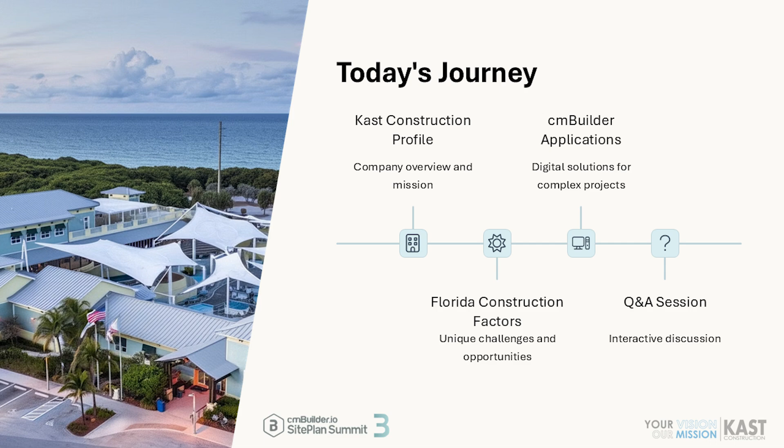If any of these facts are incorrect, you can blame the internet, because I'm not from Florida, but I can attest to a lot of it. I definitely want to show you basically how all the factors that we have down in Florida, from the coastline to the atmosphere to all the weather, all the challenges that we have - basically how we use cmBuilder to address that. And then we'll save a little bit of time for some Q&A.

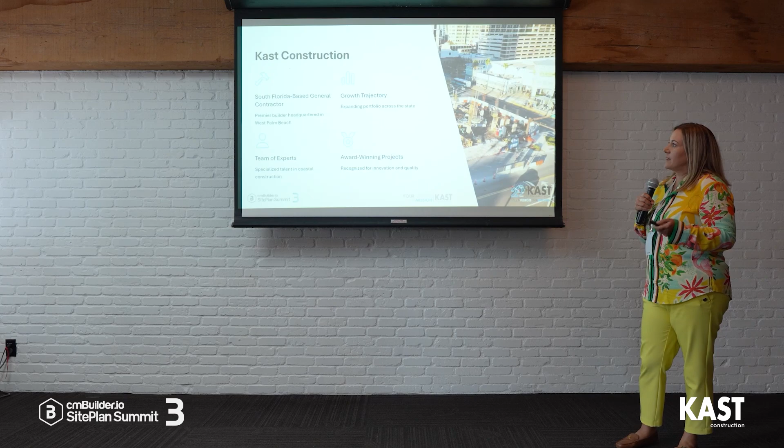All right, so KAST Construction - I mentioned they're South Florida based. We've got a few offices, but basically we've only been around 20 years. So someone mentioned 100-year companies - we're not even close. We're a pretty young company.

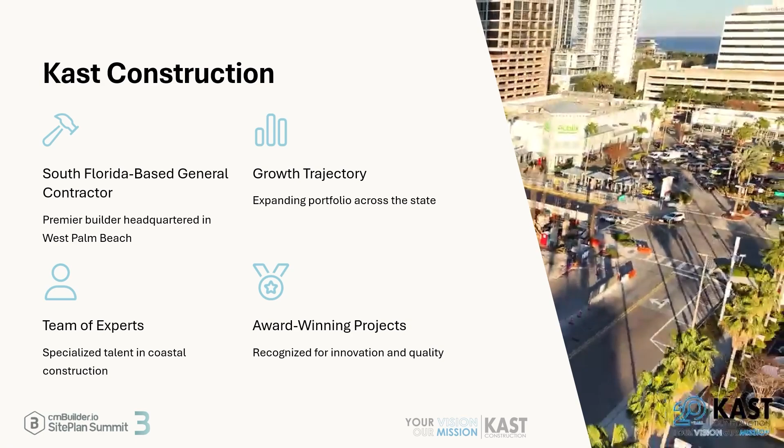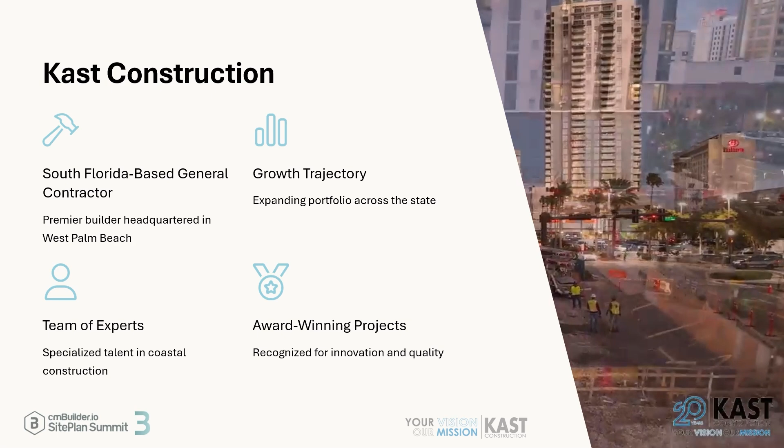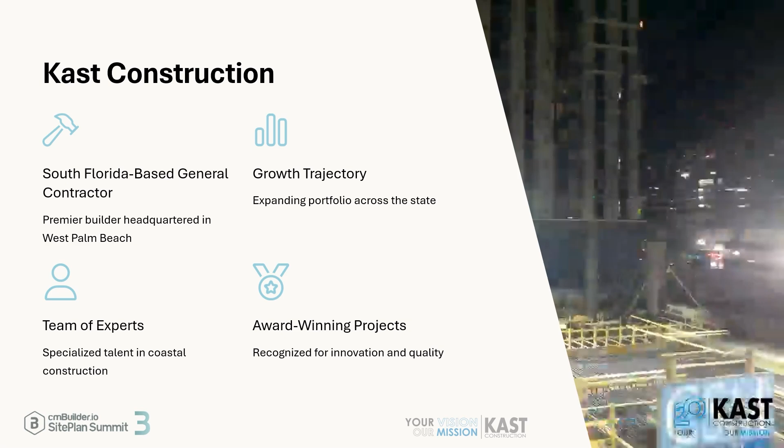Basically, the person who started KAST Construction was a builder of single-family homes. They decided, hey, we basically want to start our own general contracting company, and we want to start building high rises. And so that's how KAST was started.

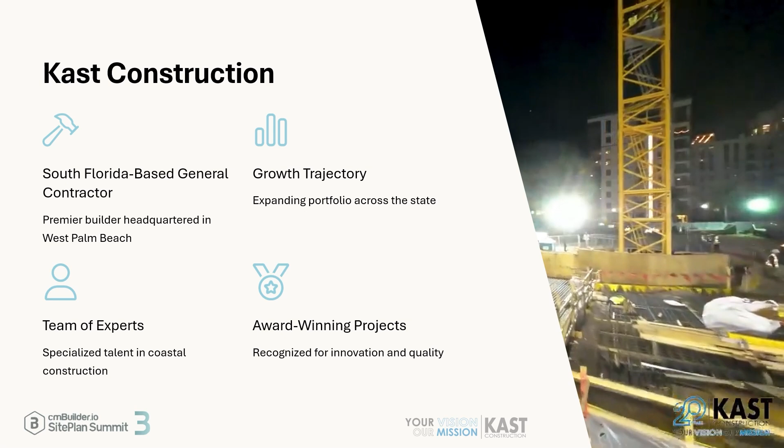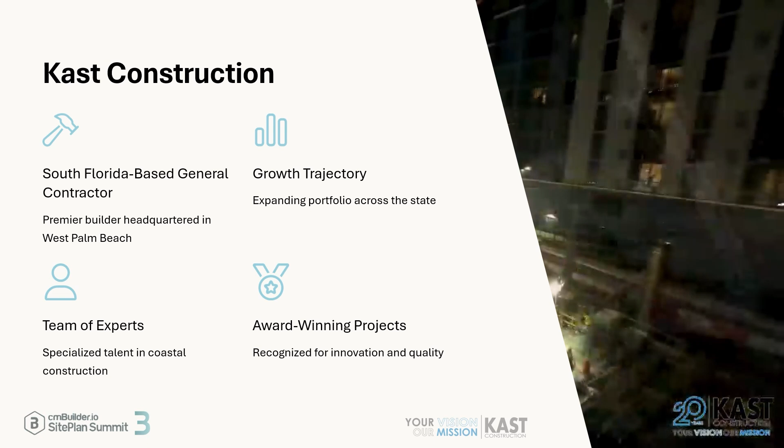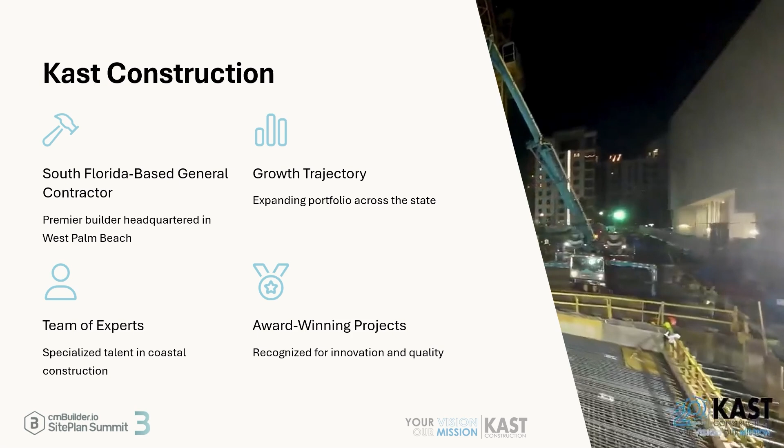Now we are owned by a collection of people who all hold titles within the company, and we're basically continuing to try to grow our company throughout South Florida and looking into some different markets, which I'll get into a bit. In South Florida, we're recognized as one of the top 3 builders and have won some local project awards, but basically, we're always looking at ways we can innovate.

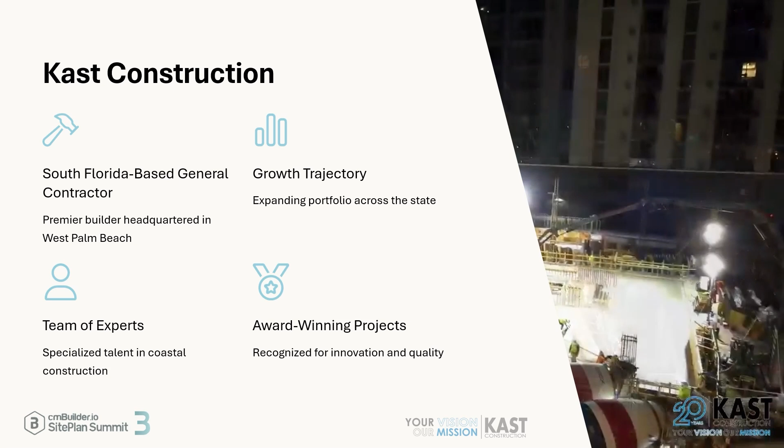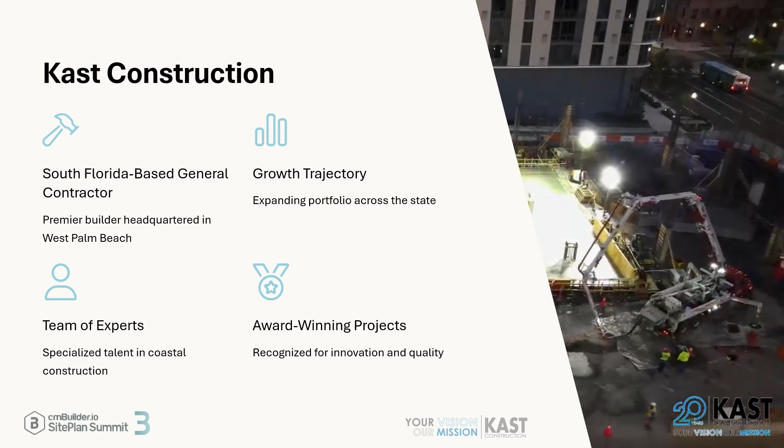And that's why I'm here today - we've been using cmBuilder for like the last 2 or 3 years, give or take. I wanted to see how we can leverage it more, but then also how we can leverage it more for our field. I've taken away a lot of stuff already from what you guys have presented, so thank you for that. These are kind of some of the projects that we build, and why it's important for us to use cmBuilder, because everywhere that we're building is pretty much an urban area.

So downtown West Palm, downtown Miami, downtown Fort Lauderdale, downtown Tampa, St. Pete, Sarasota, all the way down in Naples. And then there's a really good project that I'm going to show you about that's in Cocoa Beach, which is very close to Cape Canaveral.

So we basically are building our luxury residential. Those are high-rise condos, and the hospitality side of things, so that could be hotels. It could also be a combination of a condo and hotel. And then obviously in the multifamily, we're doing garden-style apartments and also high-rise apartments. So a lot of mixed-use development kind of goes in with that as well.

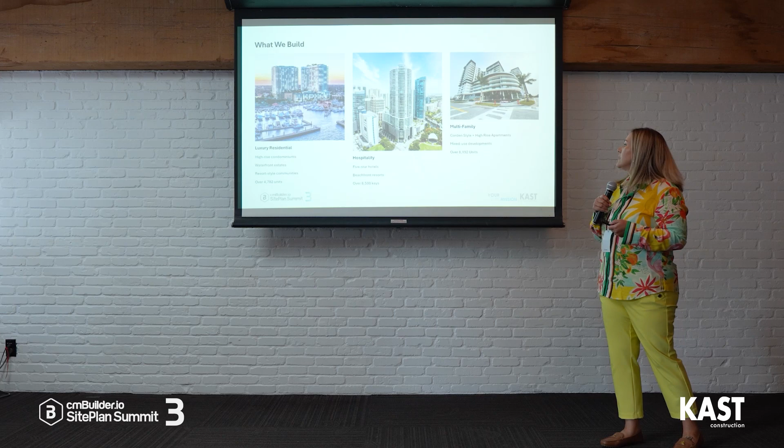All right, so here's the fun Florida facts. I call them the Sunshine State fun facts. Basically, every day we have 1,000 people moving to Florida. Most of them are coming from the Northeast. Especially after COVID, we got an onslaught of people that came down from New York. So construction never slowed down for us. So I think that's a fun fact to mention.

The other piece is we are the lightning capital, basically, of the US. We have the highest concentration of lightning strikes, and that is a very true fact. Even in the last recent week, there's been at least 3 lightning strikes that have happened on local beaches. As soon as I hear thunder, I'm running inside.

We are water paradise. Obviously, there's lots of boating and fishing. If you've ever been down there, you've got charters pretty much on every side. But even internally, there's lots of lakes, so lots of things to do. And then the entertainment world - has anybody been to the Mouse, Walt Disney World, Universal, New Epic? So obviously lots of construction going on there. I will say we do not work in there.

So a lot of considerations go into basically where we build, what we build, and some of that is depicted by the location of where you are. So we have 1,300 miles of coastline. Obviously the only part that doesn't is this part that connects up to Georgia and a little bit of Alabama. We have 7,500 lakes and ponds, which means there's lots of water that we have to build around, and 12,000 miles of waterways. So that's rivers, streams, and canals. So lots of water. A lot of topography consideration is that Florida's flat.

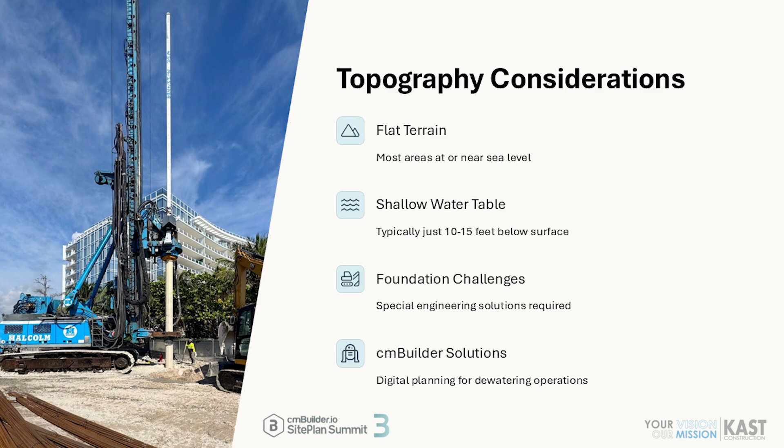So that's why I also was excited to come here, so I could see some mountains and a little change in scenery. But I would say the tallest thing you'll see in Florida is where we send our garbage. Most of our areas are basically near at sea level, and we also have a very shallow water table. So it's typically 10 to 15 feet, but that can be less - we could be at 5 feet. And we need to take that into consideration with all our job sites.

This also creates very unique challenges for foundations. So we are basically building on a giant sandbox. You'll see further in the presentation, I'll give some more examples of that. But all of that to say, that's how we're using cmBuilder to kind of solve some of these problems, planning for things like dewatering.

Climate considerations. So in the wintertime, let's say my favorite months, January through March, the weather's perfect. I would say that's the time to come. That's also when all the snowbirds are there, so it's very busy. But on average, we're about 72 degrees.

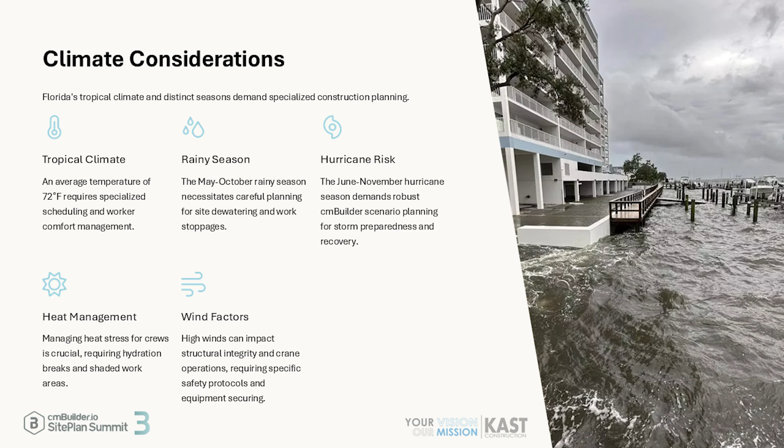However, in the summertime, we experience the rainy season. So that lasts basically the whole entire time of hurricane season, which is from June to November. And that is when basically we don't really know what's going to hit. It could hit on the Gulf side, it could hit on the Atlantic side, but those are things we have to prepare for in the logistics plan and with our safety team.

The other two pieces are the heat. So in the summertime, it can be like 100 degrees, but with humidity added in, you're looking at a heat index of over 100. So it's extremely hot, it's extremely moist, and in some cases you need to plan for heat recovery for your project teams, making sure that they're hydrated and staying hydrated and that they're not passing out from a heat stroke or something.

The other piece is wind. Obviously you can get a hurricane, but you could also get a tropical storm. Tropical storms still bring anywhere from 30 to 50 mile an hour winds. So you always have to have your construction sites prepared for that. You really have to take into consideration all of the climate, even when it's not good.

And then the fun, unforeseen things that we run into - this is my friend, Mr. Gator. I don't know, he's like kind of smiling or something.

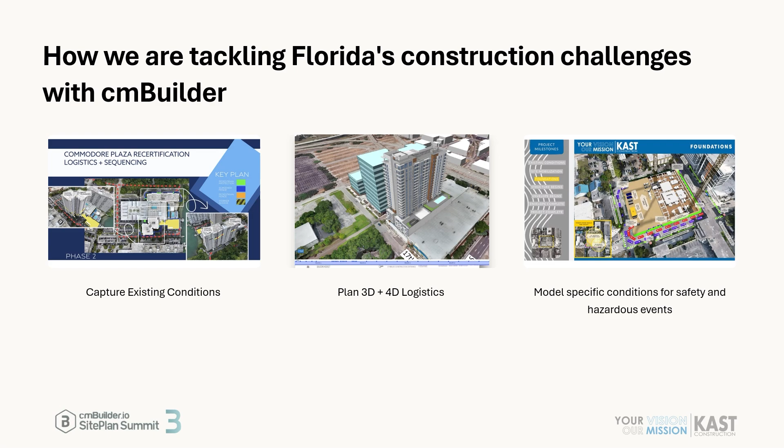In this example, this is one of the new markets we're trying to get into: recertification. If you guys heard about the Surfside collapse that happened a few years back, that basically reignited a lot of condo associations to reevaluate the needs for the future of their condos. That opened up a ton of work. So I thought, how can we use cmBuilder to depict what we would do on a recertification project? We flew it with DroneDeploy and used that to figure out all the exterior and interior work we would do—built it using only the drone models, because we didn't have any design models to go off of.

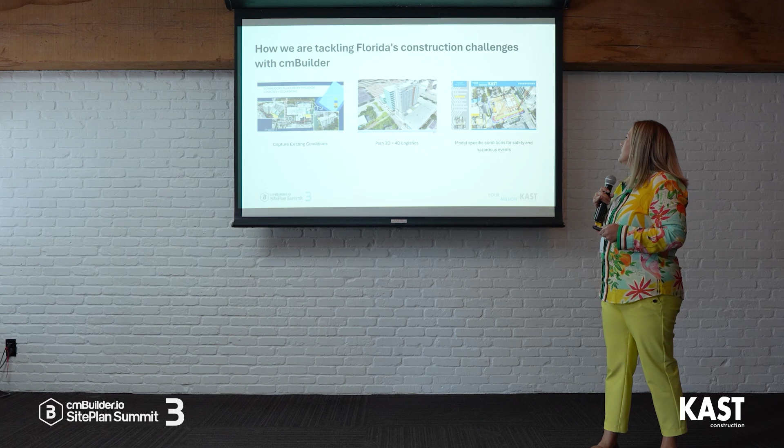The next piece is obviously planning in 3D and 4D. We do a lot of 3D—4D less so. For the 4D aspect, we just got a scheduling director about a year ago; we'd kind of been without one. That was a bit of a miss, but we're getting into the 4D side where we can actually bring in an Oracle schedule, and then take that information in cmBuilder and develop it further for the safety and hazards we have in Florida.

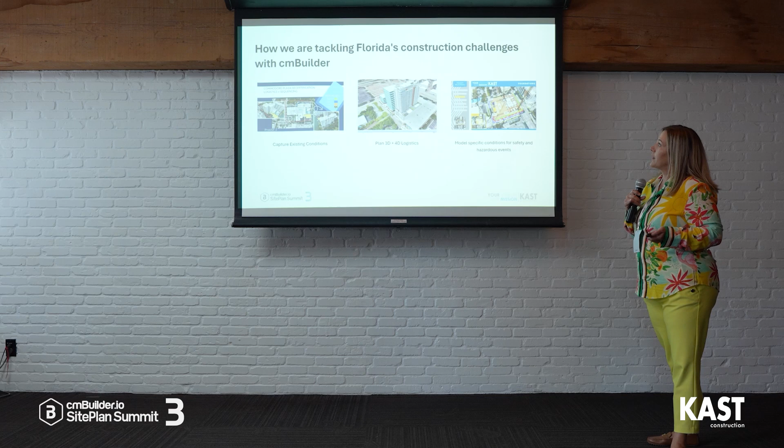So I thought I'd give you two examples. One is what I'm calling the skyscraper, and then I'll show you another example of the sandcastle.

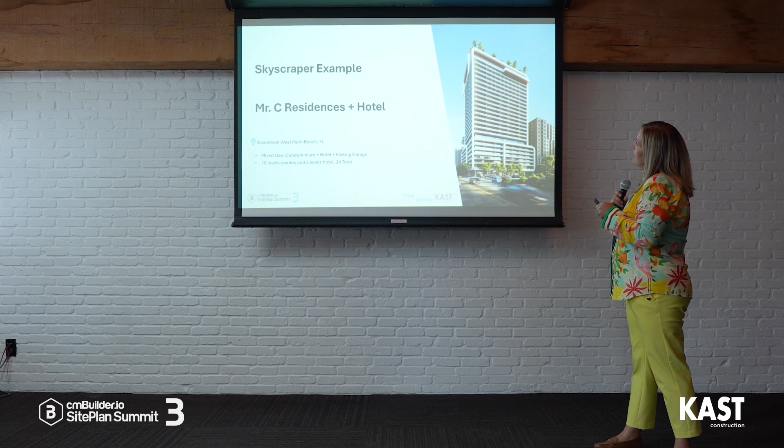This project is in downtown West Palm Beach—the Mr. C Residence and Hotel. That's Cipriani; they have a local chain, I think on the East Coast. I'm not sure where else they are, but I know they're building another one pretty similar in Miami. This is mixed use, so the lower floors going up to about right there are condos, and the upper level is all hotel. We have two pools—one on the podium deck above the parking garage, and one at the very top, where you saw those trees.

This project really just got started about two months ago, and it's still ongoing, but one of the things we wanted to demonstrate in cmBuilder was all of the demo work and some of the contaminated soil we needed to remedy. So we basically just used zones.

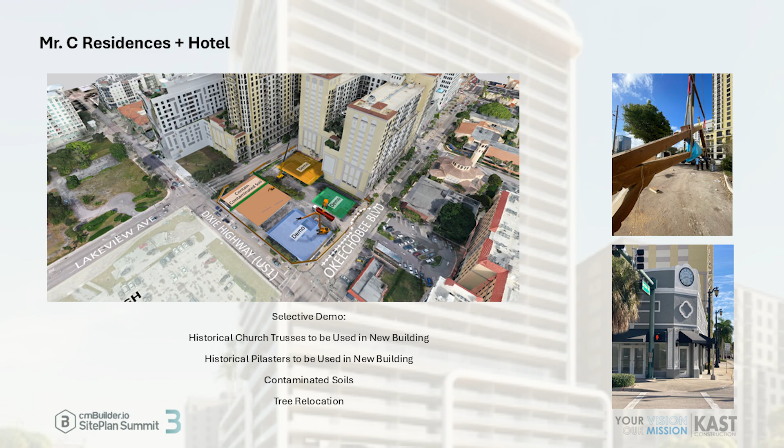It's pretty basic, but at the time I wasn't sure how else we were going to show this other than just taking parts of the drone and deleting them or making some box. So we basically just showed that by using some zones.

As we were demoing, a lot of the conversation revolved around some of the things we needed to keep, which included these historic trusses and then these columns. I don't know why they wanted to keep them because they didn't really look that great, to be honest, but basically we had to save those, and they're using those in the new design.

Part of that selective demo is figuring out where we're going to take these, where we're going to store them. Because it's Florida and it's wood, there are obviously some moisture concerns. Same with the columns, so those ended up getting hauled off site somewhere else. Basically they'll be incorporated back into the building once we actually start building it. So we're not quite there yet.

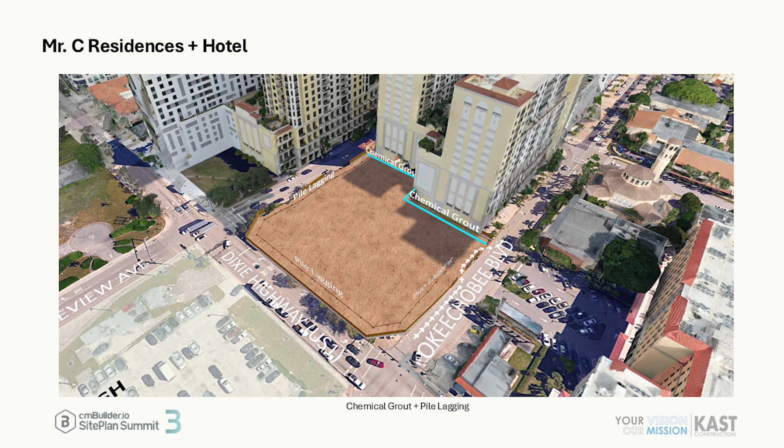Moving on, the other piece we had to figure out is our piling and grouting. There was a question of how do you want me to show this chemical grouting? I could go into depth to show a bunch of piles and how we actually do it, or we could just do a 3D line. It's pretty basic but intuitive enough, and I just added some text in here.

We did talk about doing pile lagging, and this was a couple months ago. That's since been taken out of the scope. They're just going to do some regular piles, sheet piles.

So we kind of walked through those steps, trying to figure out how we want to show this in cmBuilder. Then we started actually bringing the building up, which I'll say this is also outdated. I learned like the week before I went on vacation that we're only going to build this portion on the south side here for the first part.

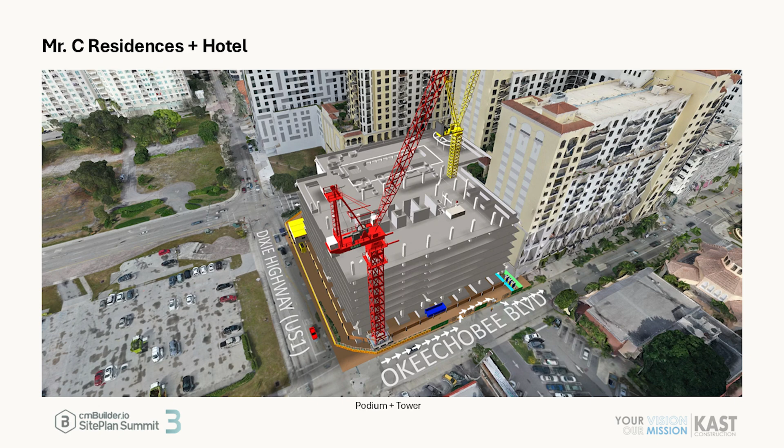So we're going to build part of that podium because it's a very small footprint. We need to use the other side for our laydown. This other section over here, they're actually going to bring up once they get to the 8th floor deck. But the beauty about cmBuilder is once I'm back, I'll be able to go in there and update this to show that.

The other piece is they determined that this crane location will not work, which we went round and round on many different crane configurations, working with our subcontractor, Baker Concrete, trying to figure out the best placement for these cranes, given that we have existing towers around us, and something not currently shown, but there is going to be a brand new tower going up right across the street.

So we're going to have a bit of a battle when it comes to our tower cranes and also all of our deliveries. We had to come up with a plan that was going to help us in the long run, which meant basically breaking out this tower portion and breaking out the podium. So that's more to do for me later.

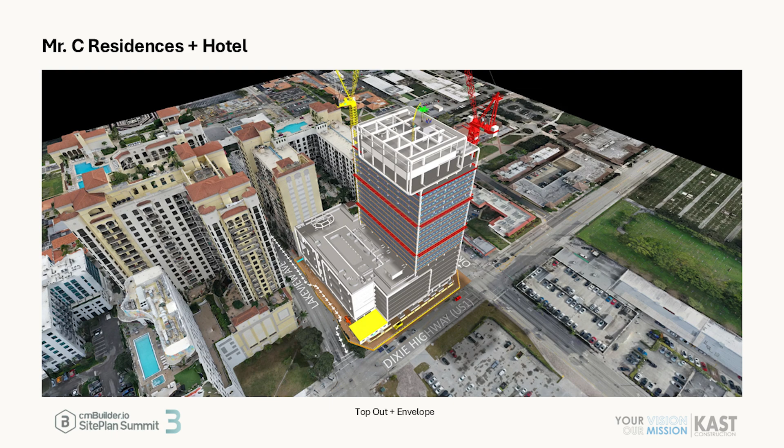So basically, once we got up to the top, we wanted to show all the different floors where we were going to have all of our outrigger netting and showing our jumps. I skipped a bunch of slides in here because it shows all the same things you guys have seen before. At every project, we like to do a little topping out party like most people do, but sometimes ours involves a palm tree, and sometimes it involves an American flag. But that's basically it on this project.

I think the biggest thing here is that for us, cmBuilder really helped us determine the best placement for our tower cranes. Then also, talking with our subcontractors in the early stages of pre-con, we really wanted to dive into their scope. So we would pull this model up and basically use it to have those conversations.

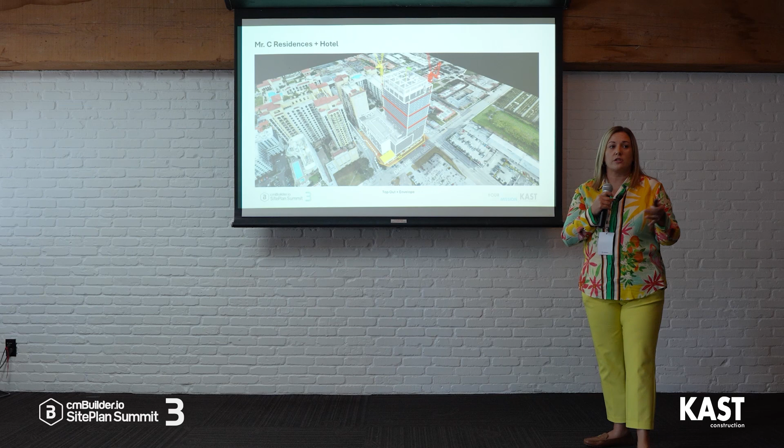We'd figure out, do you guys understand the scope? Are there scope gaps that we need to address? And then we would make changes. So that was kind of, I think to me, one of the best stories out of this.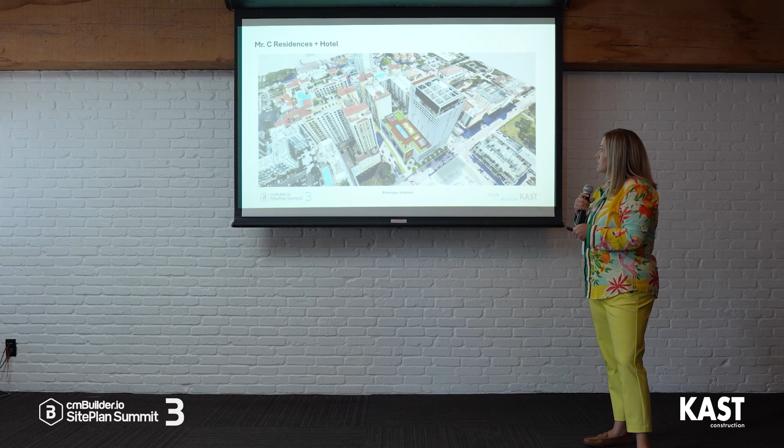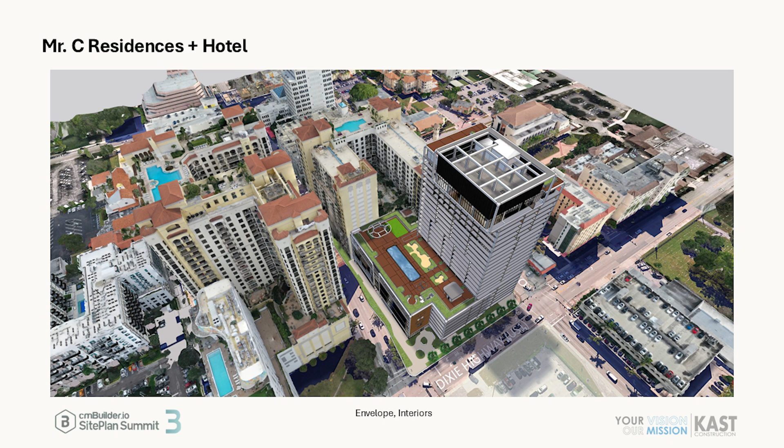And that's kind of the finished product here. You can kind of see the roof up here, and then there'll be a significant cooling tower up here on this part. And then somewhere here there will be another building, whatever that looks like.

All right, so the Sandcastle project. Now this one I'm heavily involved in at the current moment. I'm the main VDC manager for it, so I'm doing all the coordination, all the logistics, the mock-up, you name it—anything 3D, I'm the one touching it. So I thought this would be a really good example to show.

This is in Cocoa Beach. This is going to be a Westin Resort and Convention Center. The hotel side of things is only about 6 levels. It's on a 15-acre site right on the beach in Cocoa Beach, and it's going to have about 502 hotel rooms, plus the convention center and a parking garage.

The coolest thing about this project, I would say, is that it's in direct path of Cape Canaveral, so you can actually watch all the flights take off, all the rockets. My first day on this project, the owner also owns the Hilton next door, so as I was walking in, I felt the earth shaking beneath my feet. I was like, what's happening? Then I looked up and saw the rocket taking off. So it's pretty cool to see that on your first day.

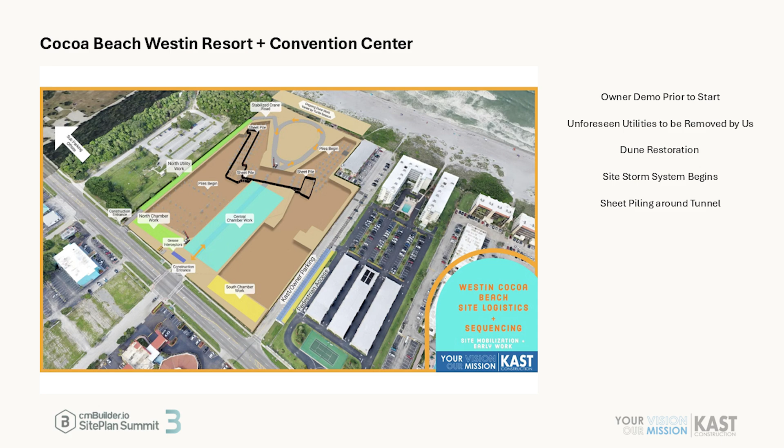So this is basically the site. We have the full extent here, except for one existing building called the Marlin. They didn't sell out, so they still have some rentals. But everything else here was an old rundown hotel that hadn't been used in a while. To this north side, you've got Lori Wilson Park, which remains active and open the whole time, and then there's a public beach area over here.

So the way this project gets broken down is: the Convention Center is up here on the north side. You can kind of see the outline of the tower, which forms a U shape. The lower level down here is basically part of the CEP, and then your parking garage here. You'll see it more in a couple other slides.

Some of the earliest work we needed to figure out was the chambers—the storm chambers. I think somebody did an example of it earlier; I really wish I would have known that content was out there. Could you share it? Because I didn't know how we were going to show this. So I basically used some zones again and called out all the work we were going to be doing.

Because it's such a big site, this chamber work had to start almost immediately, and it's right in the middle of the site. That made an extra complication because deliveries can only go so far, and we needed to be back here. So we had a side road running along Lori Wilson Park, where we were able to bring in most of the deliveries and start building the tower, which is right through here.

Now the other piece of this is that we have a tunnel that runs underneath. That tunnel is basically to support each of the sides and allow all the workers underneath to go back and forth to all the restaurants, cleaning crew, and everything else.

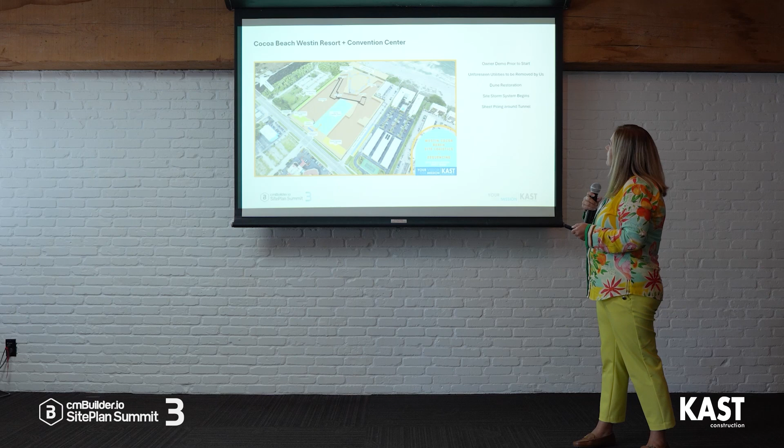All in all, this is the whole outline of our site. We started with the sheet piles, and I wanted to show some actual photos of the site. When they say it's a sandbox, they mean it's a sandbox. Our project team likes to call themselves the castaways—they kind of feel like they're out here on an island.

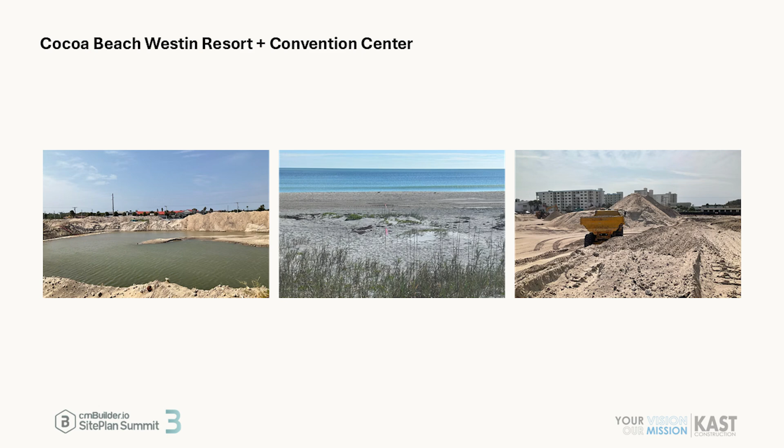But this is basically what the site looked like when we started just digging the hole, and water immediately fills up. That's why sheet piling was so important. And then obviously starting that dune work, because that dune work is going to continue all the way through the project.

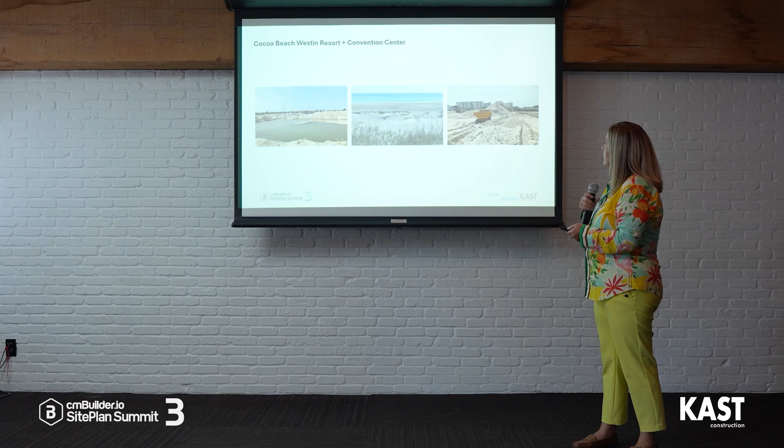So once we got past all of our sheet piling and got our tunnel in, we started working on foundations. And really the tower is what was going to go first.

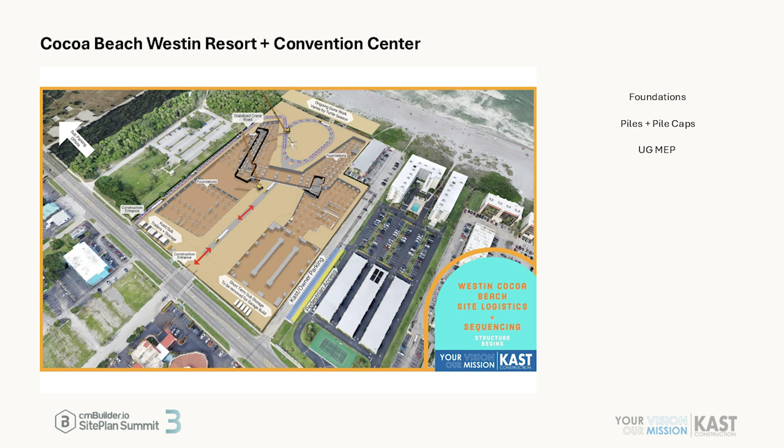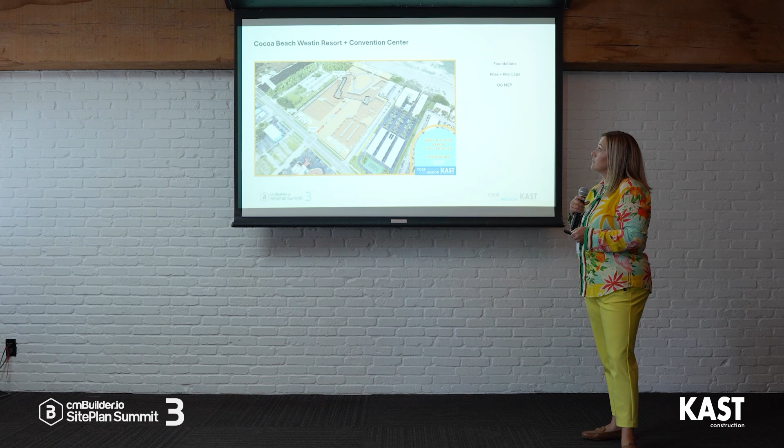I kind of broke this out because technically this project started in 2020. I had already done this logistics plan in a 4D software back in 2020, and I broke it down into smaller milestones since I had to redo it twice. It showed some general things, starting with site mobilization, foundations, and then working up the structure to completion. It was just enough information for us to communicate to our team what we were going to do.

We basically had 3 to 4 pile drivers going on at the same time, working so that we could start our foundations.

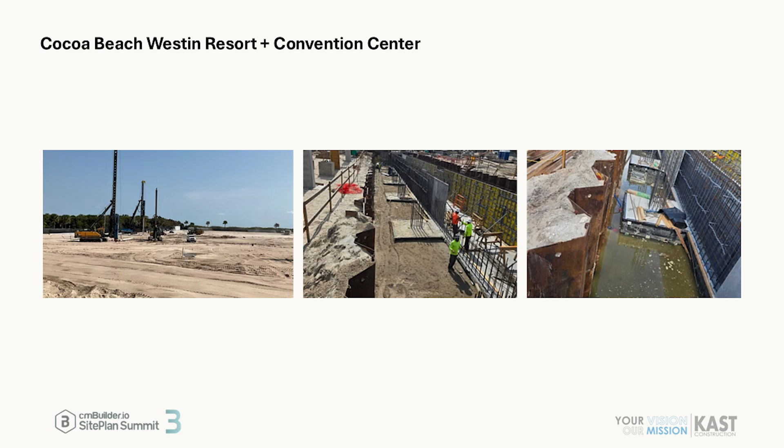And then you can see here, this is where the tunnel work is ongoing, with foundations butting up right against the foundation. You can see here we had our sheet piles looking nice and dry.

And then this - the water always finds a place to come. There could have been a rain or something that just happened here. So I wanted to note that unique thing about Florida - you have a plan and it doesn't always go according to plan, so you should have a backup plan.

And then from here, we have the structure up. In this phase, I thought it was cool that I was able to actually show some outrigger netting, which is already built into cmBuilder before I had to model that from scratch.

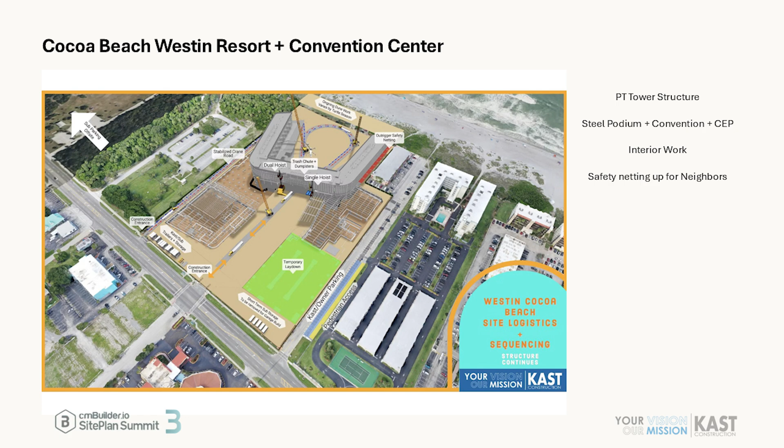In this project, we have basically the tower, which is all post-tension, but you're supporting a lower convention area, and the CEP is all structural steel. And I'll mention the parking garage is precast. So we had 3 different types of structure going on at the same time, or will be going on at the same time. The steel hasn't quite started yet.

In the beginning, we said most of our traffic's going to go around the back, but then once we get the tower up, our main traffic needs to go through here, and we can utilize some of this area where the parking garage is for laydown. It basically opened up this area for us to bring traffic in and out.

It's pretty easy to show a couple hoists in here, but we had to put them on this side just so that we have access to them, because if we put them on the back side, the problem is we're going to have a pool here, and we're going to be working in this area, so putting the hoist on that side didn't make sense.

And eventually there's also a spot area back here - we wouldn't be able to access this road for much longer.

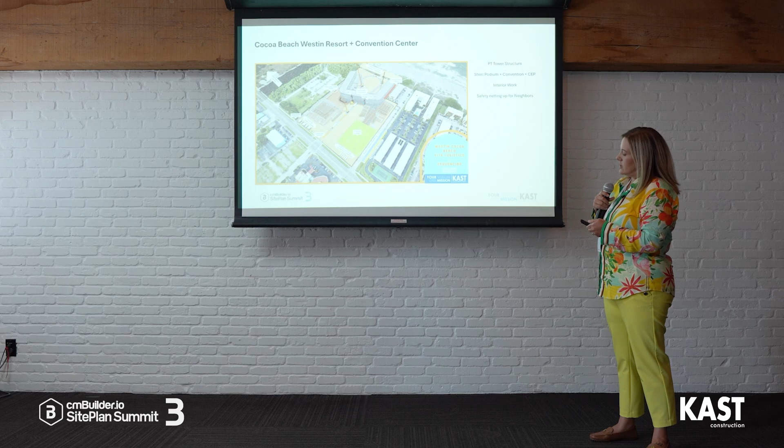While we were doing this, I should mention there's a little bit of interior work going on, but that also isn't happening yet in real life, because this is basically the current stage of where we're at with construction. We've basically built this whole south wing, going into this bridge area.

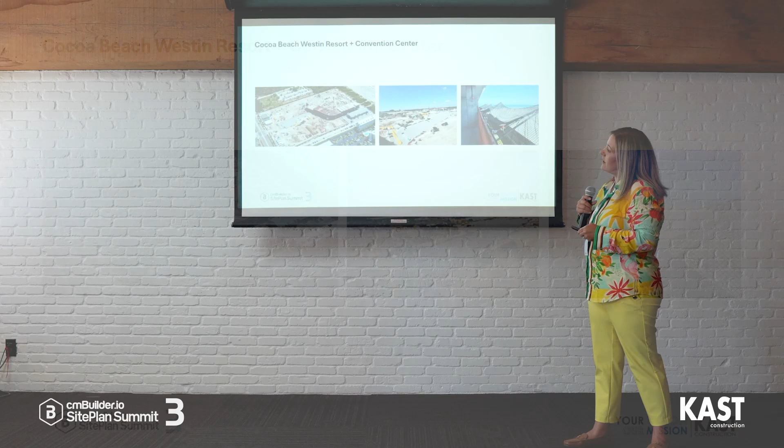You can see the storm chamber work is wrapping up here in the middle, and eventually it's going to move to the sides where there's a couple other areas. We have started our slab on grade, at least in this area, and are working to build up this whole CEP, with the convention center being our last and final area.

And there's a picture of our actual netting, supporting and making sure safety-wise we didn't have anything blowing over onto that Marlin building, which is existing, still active, with people walking by there going to the beach.

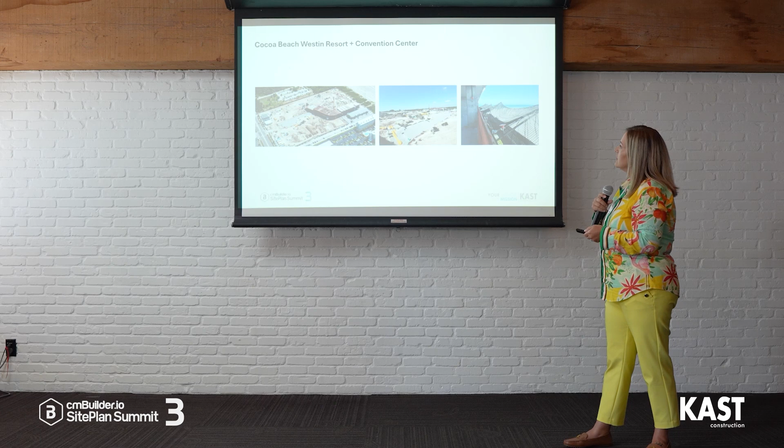And then as we close out, we finish up with the pools. Your dune work is still ongoing, and we're basically starting to build this garage, which I mentioned is precast. So that would be the last component here.

There's also going to be a wave pool where you can actually surf - first of its kind, they say. It's supposed to simulate real waves.

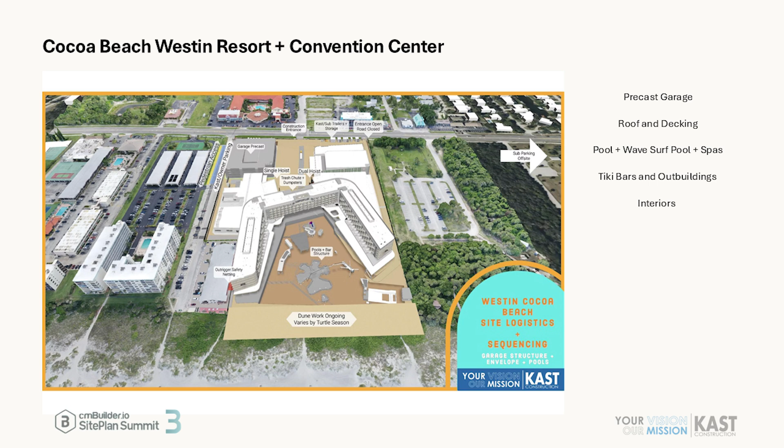And then the envelope interior pretty much just continues on here, but we wanted to show the next phase of this, the completion, to where we get to the final stage, which is showing our site work, the pool, the fountain area, and the drive up. So that's pretty much what it will look like when it's finished.

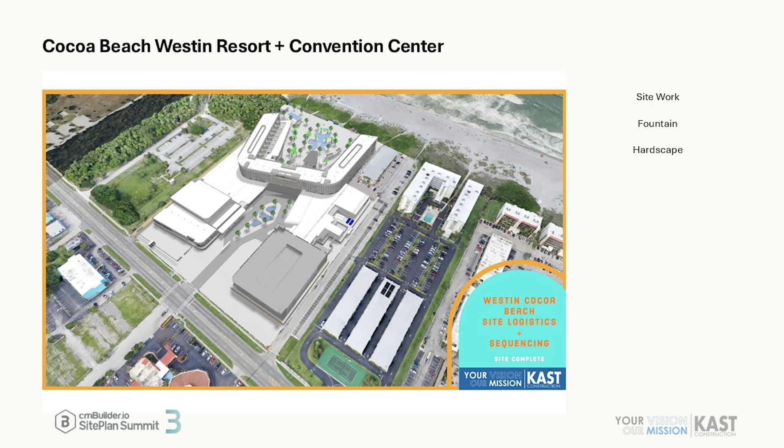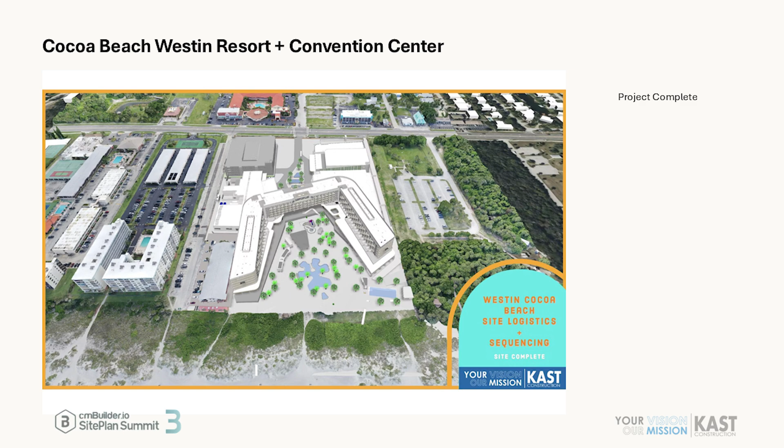The best part about this project, I think, is that they took a lot of care into considering the orientation of it to the beach, and paying a lot of homage to the Space Coast. So there's a lot of little things in there that will be super cool for people who are space enthusiasts.

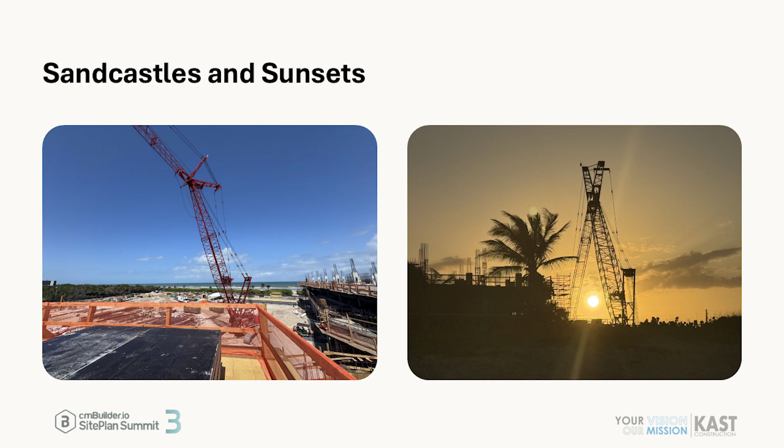And the coolest part, I think, is a lot of times in the VDC world, I don't know how many hours I spent on that particular logistics plan since I did it twice. But I went out on the job site, I don't know, like a month before May, and it was basically looking like this at the time.

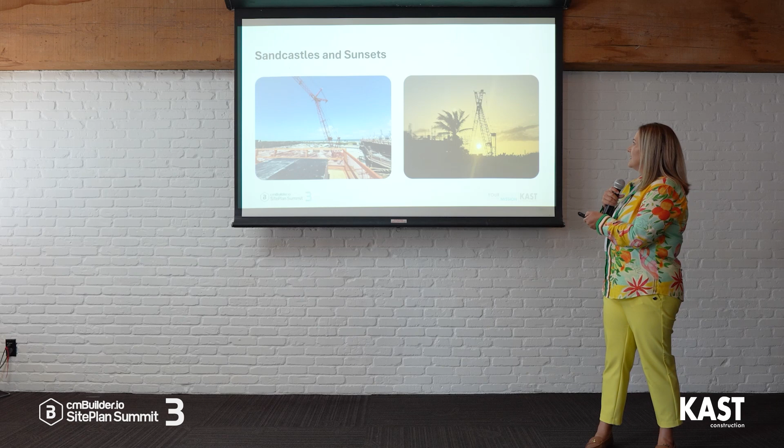Went up on the deck, went to go see some issues they were having, and I was staying down at this little hotel at the corner. So after the job site was over, I was like, hey, I'm just gonna take a stroll on the beach, go check out what it actually looks like at nighttime, take it in, grab a little sunset pic of all the work I've done so far on this project. Not just the logistics plans, but also all the coordination, and catch a little sunset photo. So I highly encourage finding joy in the things that you do, because otherwise it just sucks.

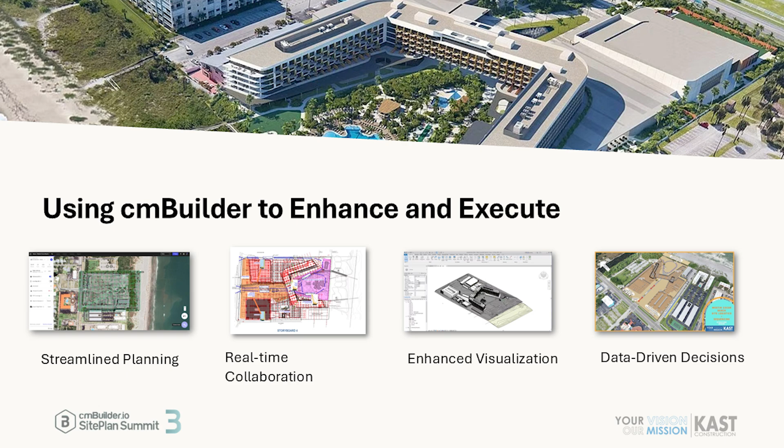So basically for us using cmBuilder, we're just trying to enhance and execute what we want to convey. We want to streamline, we want to collaborate, we want to be able to take design models and easily input them in, even with updates, and make decisions based on that information. So in a nutshell, that's basically what we're trying to do with cmBuilder.

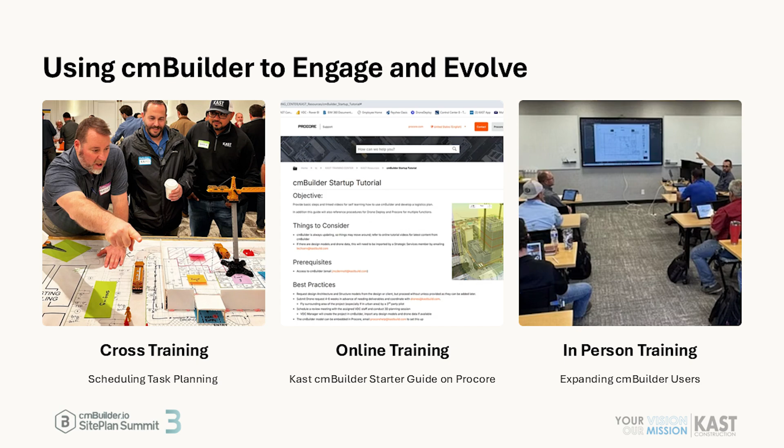And then my future goals, something that's kind of already in action, is really working with our scheduling department. They've been doing some task planning, trying to get everybody trained there, where they were actually building some hands-on logistics plans, which I thought was cool. Taking it a little old school here for us to then take it new school, hopefully.

We started developing an in-house cmBuilder startup tutorial, basically steps for if anybody didn't know how to come into cmBuilder and use it. I actually emailed the cmBuilder team and said, hey guys, do you have any tips or tricks? How can we implement this? And they sent me a whole list of things. So I was like, all right, great.

That helps a lot. So we're currently cross-referencing that, making some edits, putting it through some testing with some of our users to see what their thoughts are. Is this intuitive enough? Is this easy enough for you to follow? Because at the end of the day, we do want more superintendents and more project managers getting in here, because right now it's just us, and it buries us when we have other pressing work to do.

And then the last piece would be to actually do some in-person training, which we do mostly in our West Palm office, but at this moment we don't have anything scheduled until we get this out there, and then we're going to start scheduling those training sessions to help bring people in, give them more hands-on clicks, and make it easy for them. We do have some users who are willing to do it. We have an estimator in Miami, we have a project executive on our Tampa side. They've all gotten in there and made their own scenarios, which is awesome.